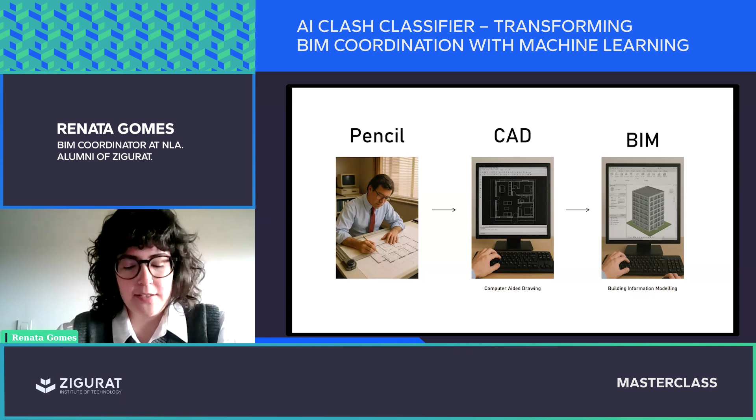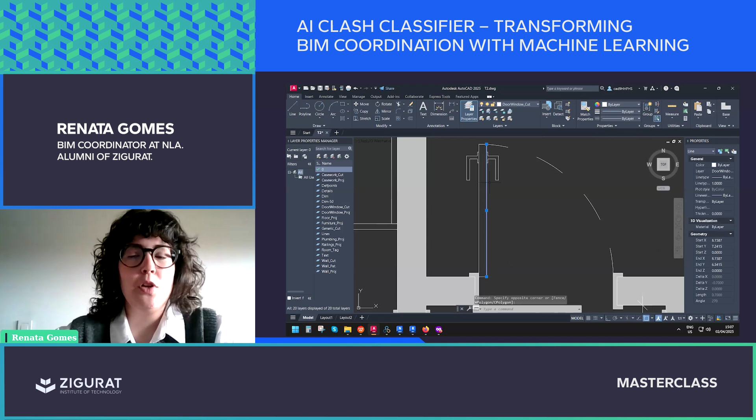Here we have a simple apartment floor plan made with the CAD method. I consider CAD as a digital version of the pencil, because when we see this floor plan and click on this door, the software recognizes a line. When I click on the door opening, it recognizes an arc. And when I click on the wall, it understands it's a hatch. What gives meaning to these floor plans is the human interpretation of those geometries — the software itself is not aware of the architectural categories inside here.

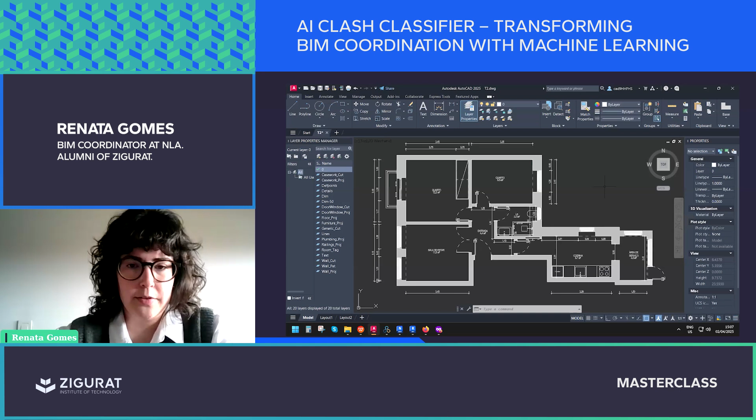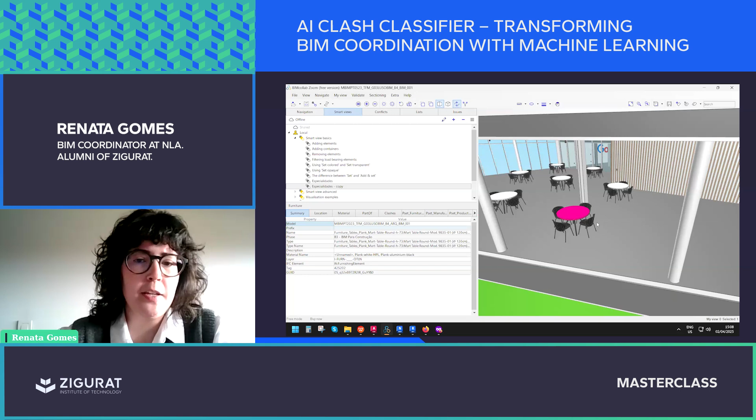Here we have an office building made by my group during our Master in BIM Management. Unlike in CAD projects, when we click on the elements we can see embedded information — for example, this is a curtain wall, this is furniture tables, this is a seating, and this is a column. So it is possible to embed information inside the elements, and that gives it so much potential for building data sets over it.

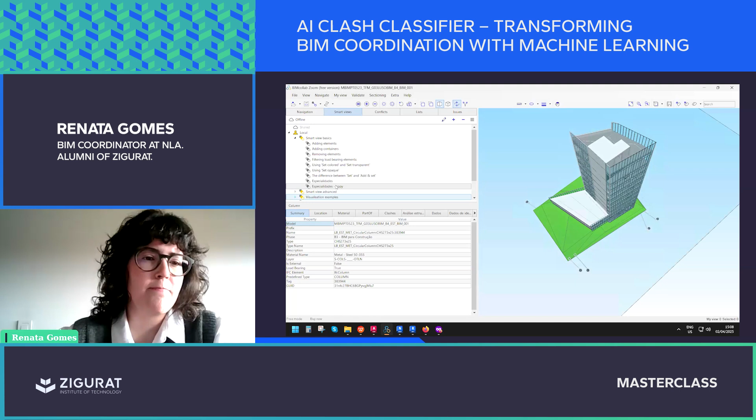Another advantage of BIM is that it is possible to analyze the project — it's possible to analyze all the disciplines inside the project. We can have those overlapped and look for mistakes before the construction phase. So it's also very interesting for that.

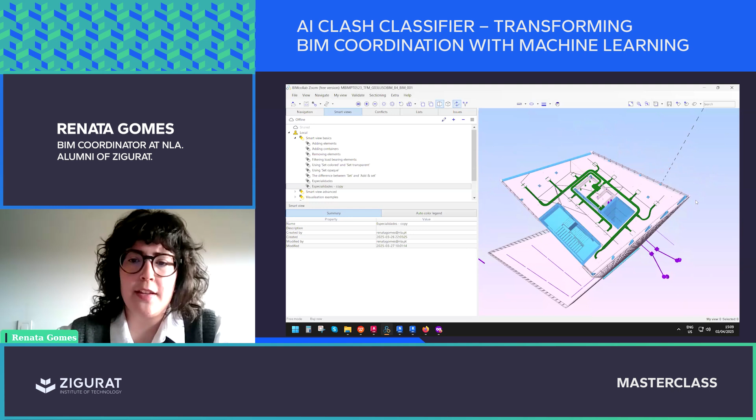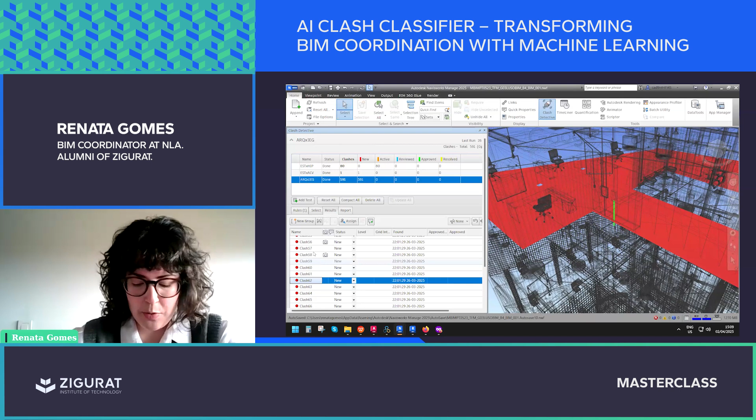Among the different possible BIM uses, project coordination is one of the most used, in order to evaluate different disciplines' compatibilizations. Clash detection is the main method to identify collisions between project disciplines, and each collision is represented by a line in a long report that contains all the information we want about the elements involved in the clash itself.

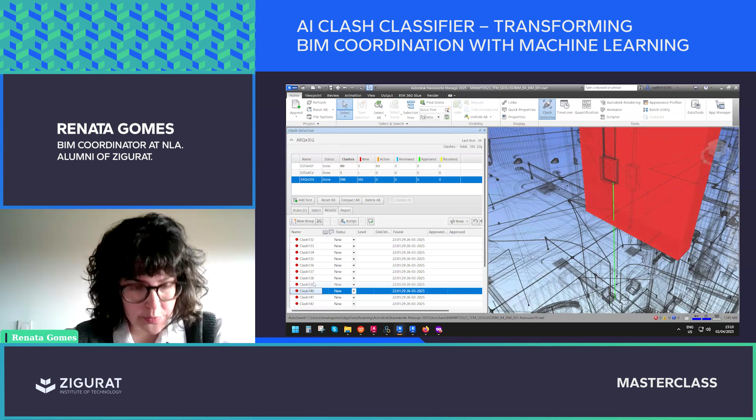The challenge within this resource is that the amount of information we are able to get out of this can be very extensive, which means that someone will have to interpret manually each one of those numerous clashes identified by the clash report, which leads us to our project scope.

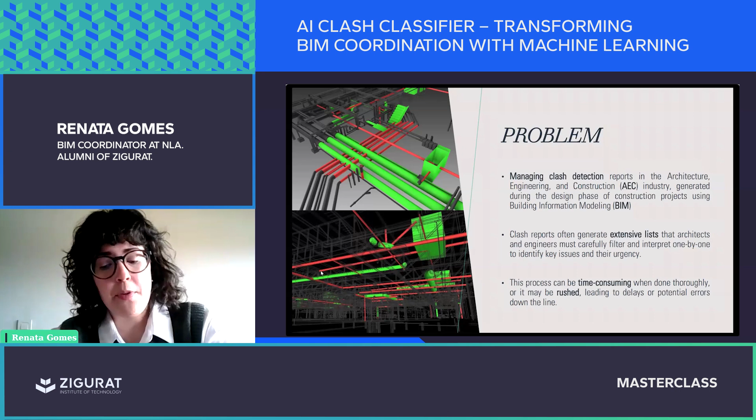A clash report, as we saw, is a list of collisions between elements of different project disciplines. The problem is that this list can be very extensive, which means architects and engineers must carefully interpret each clash one by one. This process can either be time-consuming when done thoroughly, or it may be rushed, leading to potential errors down the line. The main idea is, since artificial intelligence is very good at processing and interpreting large data sets...

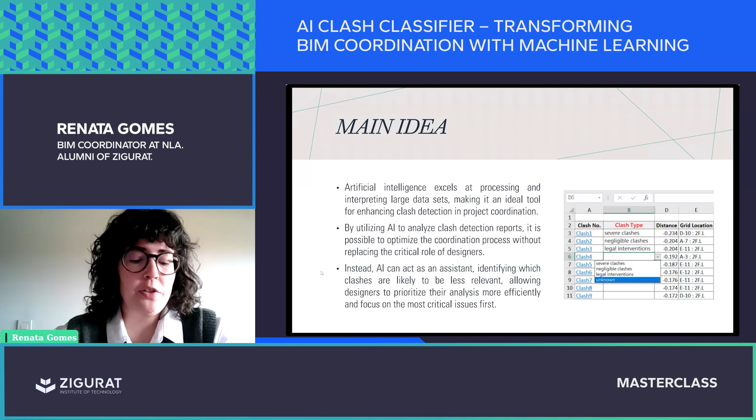We thought about using it to go through those very long clash reports and help designers by prioritizing each clash. AI won't discard any clash, but will indicate how urgent each one might be, so that designers can address critical issues first and lose less time with low priority ones.

In order to do so, and considering the complexity of the whole problem, we decided to focus on delivering a minimal viable product, an MVP, which means addressing a specific yet important aspect of the issue to ensure that all efforts are both practical and manageable within the project's timeframe.

Our MVP consists of resolving clashes between beams and pipes. We chose this specific type of clash because it is easier to categorize with minimal ambiguity.

With the assistance of structural engineers, we've mapped out the beam's vertical surface and divided it into 3 priority zones. The red zone, high priority: a clash in this area is strictly forbidden. The yellow zone, medium priority: not ideal, but acceptable. The green zone, low priority: generally permissible.

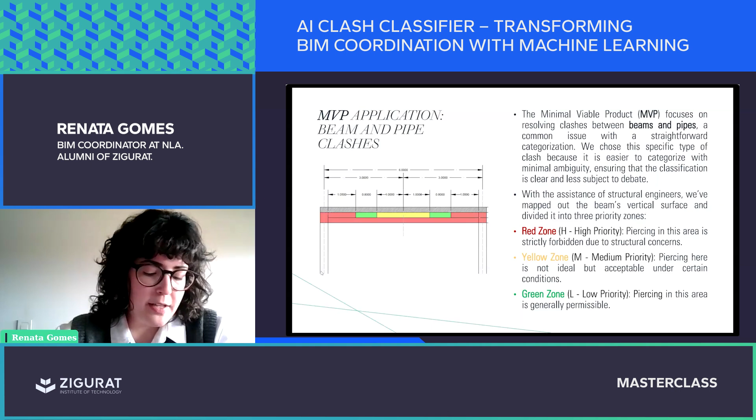Now you might be wondering, why use AI and not a filter or a simple script? First, simple filters or rule-based scripts can only work with structured data, like spreadsheets and retrievable parameters. This research input consists of both structured data, the clash report spreadsheet, and also unstructured data, the clash images that come within it, which is ideal for artificial intelligence because AI is better suited for handling unstructured data.

Here I've put an example for you to better understand what unstructured data and structured data means. Unstructured data, for example, can be a note on your fridge reminding you to buy some things at the grocery store. Structured data would have those items categorized, the quantity, the category, the price of each item. So these are different ways of organizing information, and structured data is easier for any type of computer to understand. But AI is also able, via training, to understand unstructured data, like images, for example.

Second reason why AI and not a filter or a simple script is that rule-based systems require manual updates whenever the data or context changes, making them unable to adapt to new inputs or evolving conditions without time-consuming human intervention.

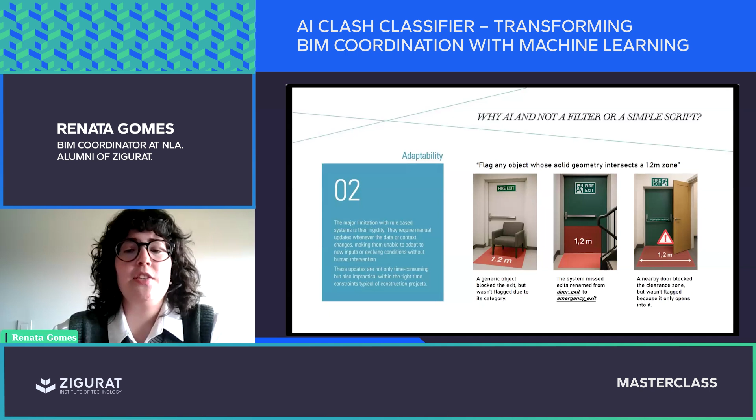And for example, if you change the name of the door you gave it to the filter, the filter might not understand that another door close by could be a problem for the clearance zone when it's opened, since it might only understand the door as a closed object. Those are just a few examples of how context can change, and when this context changes, there must be a human there to update the filter or the script.

Third reason: AI's capacity to learn and evolve over time ensures continuous improvement in accuracy as it processes new data and experiences. This flexibility helps AI remain relevant as businesses evolve.

Now let's talk about the dataset creation using BIM softwares. At first, we started out modeling the elements of our MVP diagram: the columns, the beams, and the pipes. We also made a beam family that would behave like the MVP, with these green and yellow areas for us to better understand which type of clash we had for manual classification.

So each pipe was manually classified here with an L, an M, or an H.

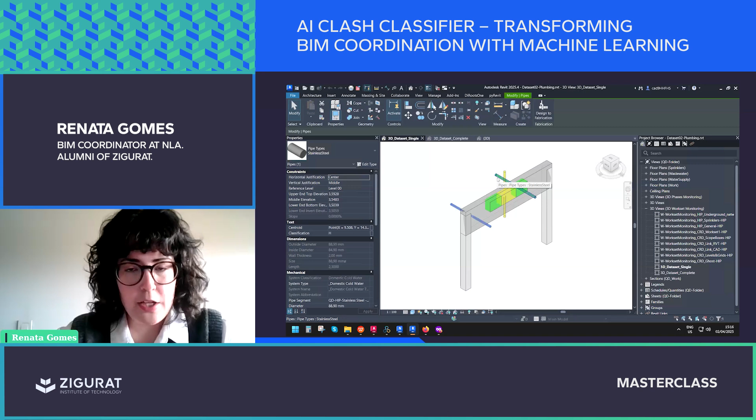After that, based on where the pipe would be pierced, we would manually classify it. Those will be our target data, our correct answer, to compare to the AI answer. After that, we multiplied this by a lot of pipes and beams so we would have a larger dataset for training, a more robust one.

Some parameters were needed, for example the centroid of the elements, like the beams. I'll try to open Dynamo to see if I can show you how we came up to this value.

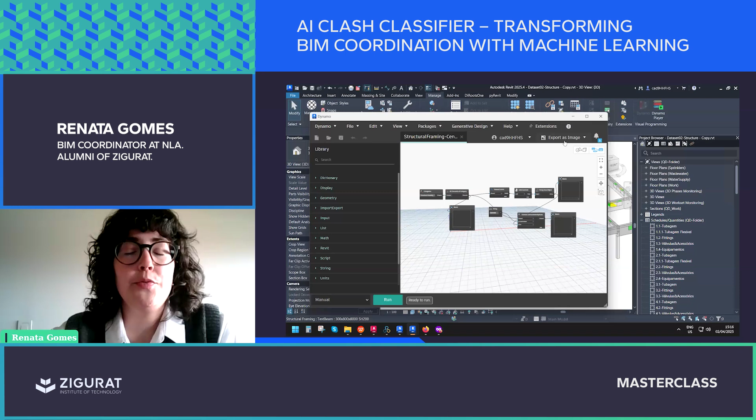So this is a simple script. We made a routine in Dynamo. Let's run this. Okay, it went well. Here we have the geometry the routine recognized, and here we have the routine itself.

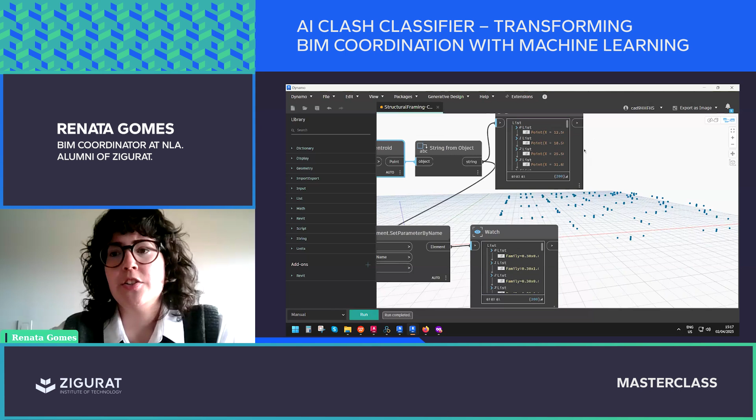So here it's calling for the beams. We can hide this, and then this will get the point out of the solid we selected. So these points are turned into coordinates that are inserted in the centroid parameter. We found that this information would be very interesting input for our training.

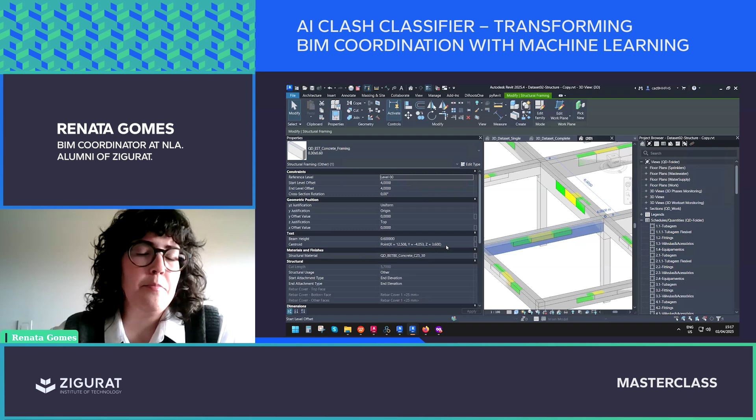These models are then imported into Navisworks, where it is decided which type of information regarding the clash and the involved elements should be included in the clash report. First, we import the models, then we activate the clash detective.

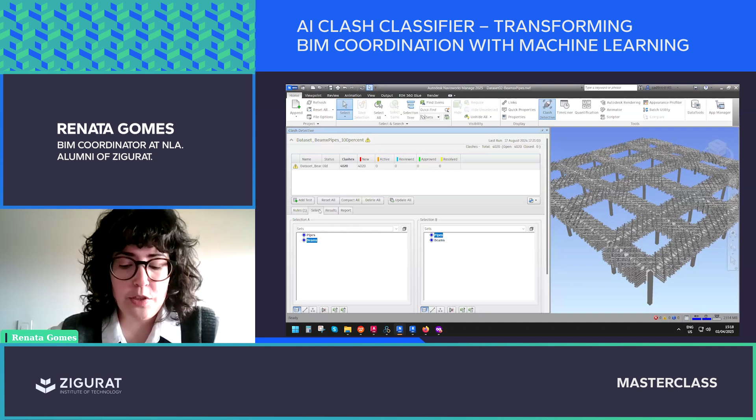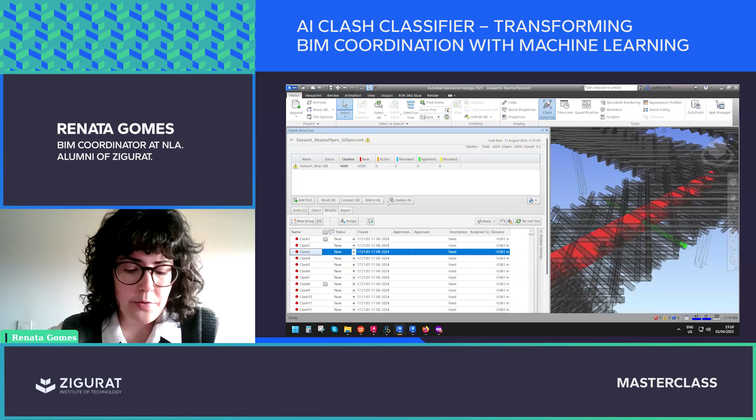In the Select tab, we pick the two elements that the program should look for when listing the clash, then set the clash tolerance so as to avoid false positives. Then in the Results tab, we can get the full list of clashes found, and we are able to see each one as we click.

And then in the Report tab, we can choose the information we want in our report and then export it. So our report will look like this. This is the HTML file we get after running the clash detection.

For the clash itself, we have its image, name, and geometrical location as XYZ coordinates. For the beams, we have its ID code, its category, and also its height, the bottom height, and the centroid coordinates.

And for the pipes, we also have the ID code and category, but also its diameter, its middle elevation, the priority parameter that we manually classified, and the coordinates of its centroid as well.

So the first step of any machine learning training process is dataset gathering. In our case, it begins by extracting input from the Revit models, which contains Revit families, Dynamo routines, and manual classification. Then inside Navisworks, every clash is listed along with the selected parameters mentioned earlier.

The result HTML file and image folder then serve as the basis for further script refining. It's our dataset.

Now we are entering the processing phase, where we will take this dataset and make it cleaner, purging it so that the machine learning can read it better with less noise inside it.

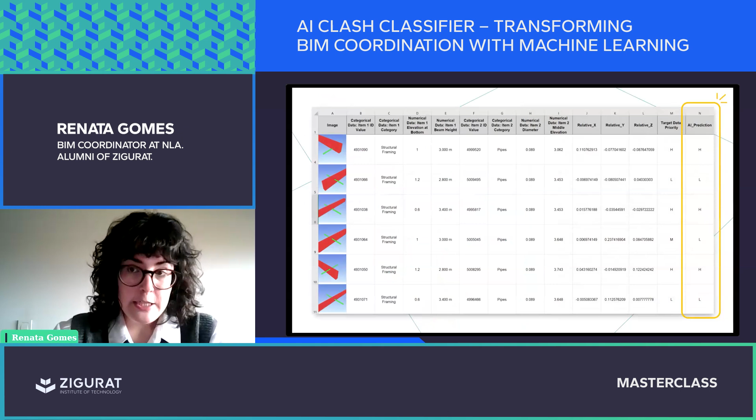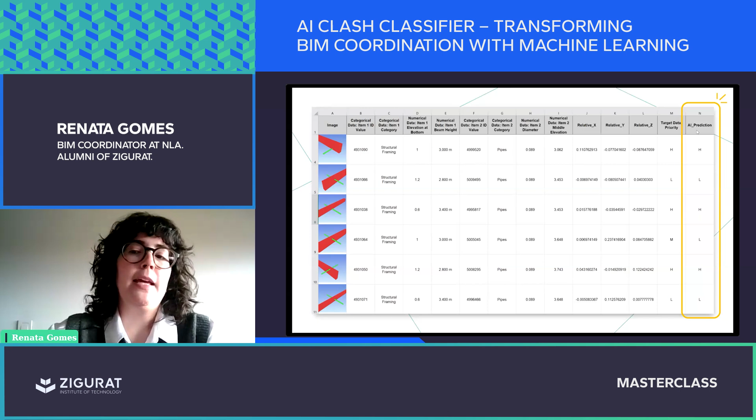This is our output. After running the test code, we get an Excel schedule with the report information alongside the target data, which are the correct answers, the parameter that we classified in Revit. Each pipe is here, the correct answer, and this is what the AI predicted. No, the AI cannot cheat and see the answers, if you're wondering. So see here, it got it wrong. But we don't have to analyze this whole Excel to understand how well the AI prediction went, because we have our evaluation performance metrics.

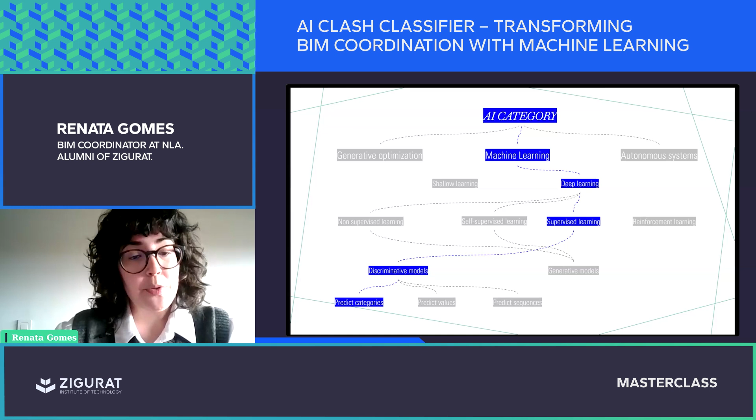So the conclusion of the project is that it aimed to improve the management of clash reports in construction by prioritizing clashes with AI, initially focusing on beam and pipe clashes through a minimal viable product approach. This helped lay groundwork for future developments.

The AI model integrates machine learning and deep learning, specifically using convolutional neural networks to analyze dual branch datasets consisting of both image and non-image data. It operates under supervised learning, leveraging labeled data to improve prediction accuracy as a discriminative model, and it focuses on accurately predicting categories based on input features, essential for enhancing decision-making in construction management.

The project demonstrates how AI can enable innovation, even for non-experts, like my group was not expert in programming, by allowing the team to build an effective AI model despite its limited technical expertise, showcasing the potential of AI in advancing technology across the architectural, engineering, and construction industry. That's it. Thank you.

Really nice, Renata. Congratulations. Thank you. Thank you so much. I don't know if Thomas wants to talk something or do some comment. Feel free, okay, Thomas? If not, I will keep going.